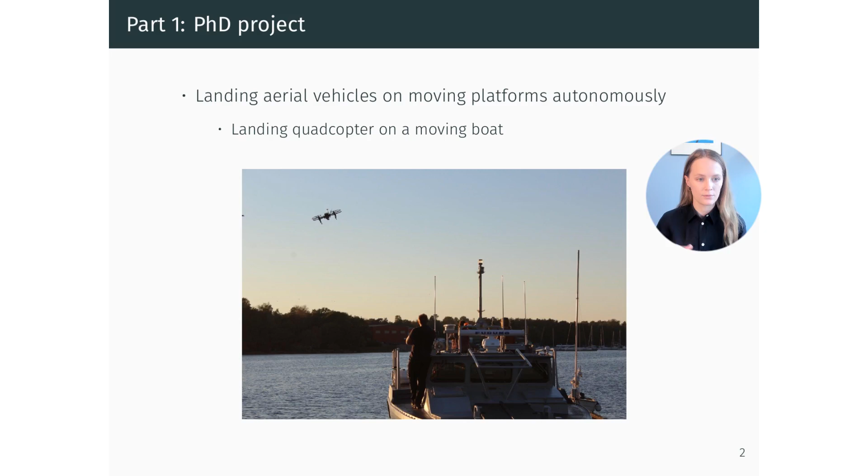So the problem that we wanted to solve was landing some sort of aerial vehicle, in this case a quadcopter, on top of a platform on a boat, which is potentially moving at very high speeds.

We realized early on that this is a very challenging maneuver for many reasons. First of all, it's a safety critical maneuver, meaning that the boat has a lot of important equipment on it that you don't want to hit with your drone. You might have crew working on the boat that you definitely don't want to hit. So there are a lot of spatial constraints on the problem where you cannot fly your drone relative to your boat.

There are many disturbances, for example, wind and waves affecting your boat. There are a lot of other types of state constraints like the attitude that you're flying at or velocity and so on. And furthermore, it's a distributed control problem since we are controlling two different vehicles, and this is also something you have to consider in your problem.

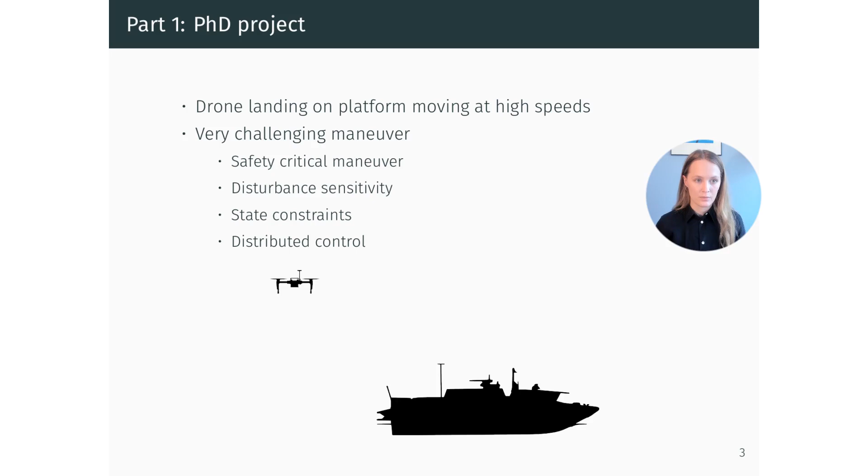So I'm not going to go into any technical details in this presentation. If you're interested, you will find my thesis online. But in the end, what we chose to do is to work with model predictive control, which is an optimization-based control framework. And we chose this for many different reasons.

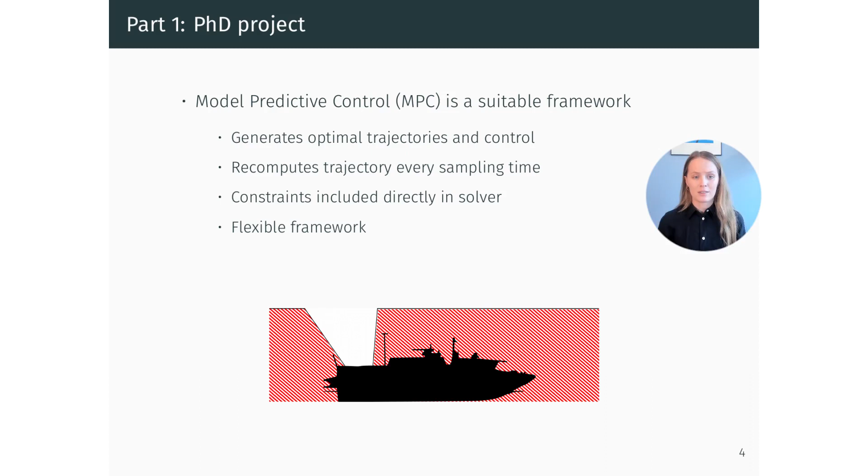It computes dynamically feasible trajectories. You're always recomputing your trajectory, which means that you will at any given point have a trajectory that works right now. The constraints are included directly in the solver, so you don't have to add them afterwards. And in general, I would say that MPC is a very, very flexible framework where as long as you can formulate your problem as an optimization problem and solve it quick enough, then you can use it as MPC.

So the problem in the end is how do you formulate this optimization problem? And it becomes a trade-off between how well do you want to describe reality with your problem, and how fast do you need to be able to solve the optimization problem to run it in real time.

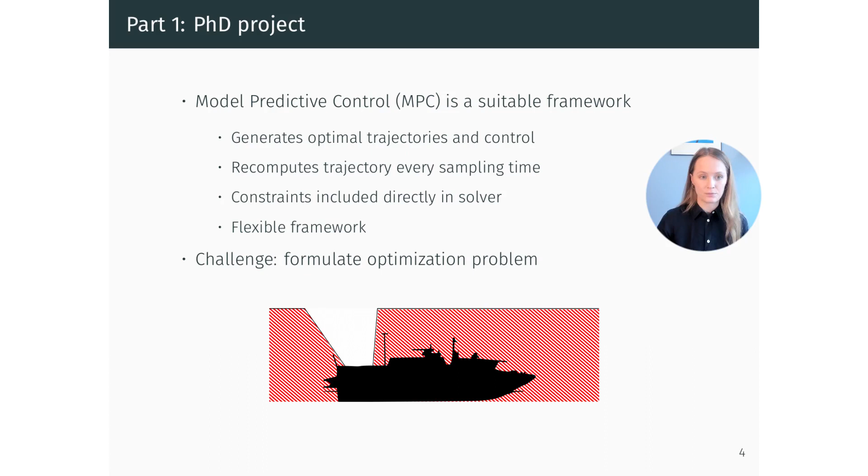From the beginning, it was very important for us to develop algorithms that worked in reality and algorithms that could run on real systems. For this reason, we worked a lot with simulations and experiments.

We were involved from early on with WARA Public Safety, where we had access to the CB90 boat and a DJI matrice. Through WARA, we also had access to a testing area, but most of all, perhaps, we had access to other researchers that we could discuss our problem with, and also people from industry to talk to.

Doing these kinds of experiments as a part of a PhD is definitely something which took a lot of time and a lot of effort. But I would say that in the end, it's really worth it because you learn a lot. You learn a lot of both practical skills while working on these different systems, but you also get a very deep understanding of your problem when you're trying to make it work in reality.

Now I'm going to talk a bit about the work that I've done since graduating. So I joined the Uppsala-based startup AirForestry, and the idea behind the company is to completely reinvent forestry by doing thinning from the air.

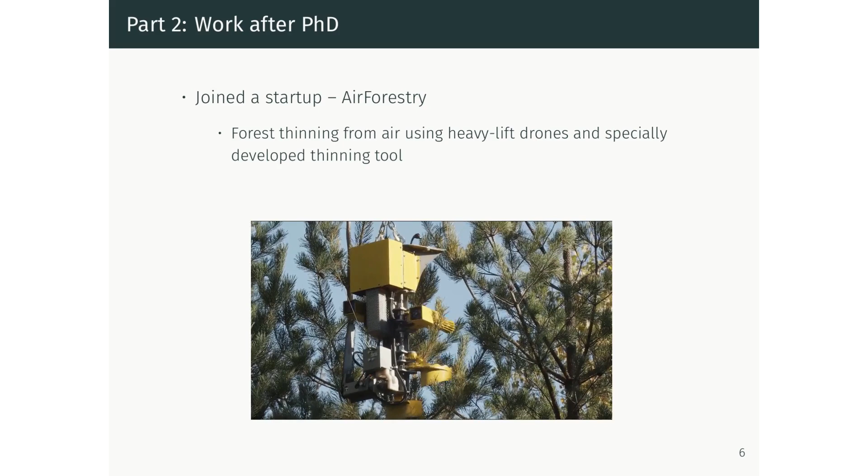AirForestry wants to reinvent this step of the thinning process and remove the need for heavy, fuel-driven vehicles, therefore reducing unnecessary harm done to the forests.

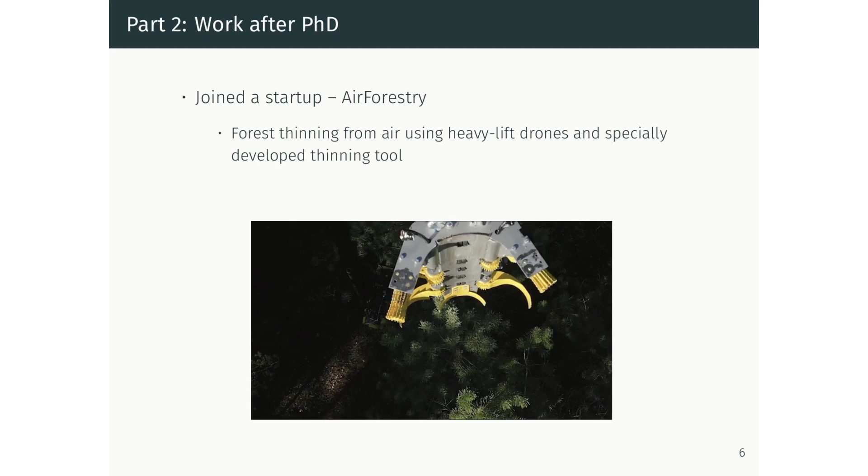This video here shows the specially developed tool from AirForestry removing the branches and cutting down a tree.

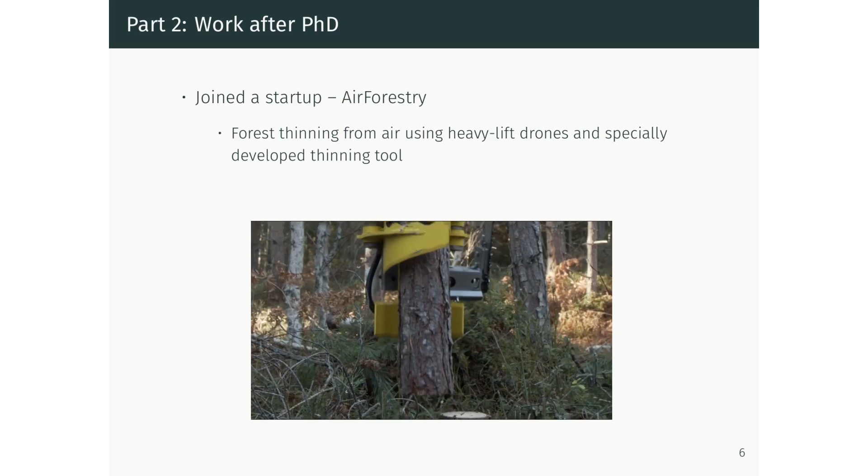After the tree has been cut down, we want to lift the tree out of the forest for collection by the forest owner. For this task, we are developing a 6.2 meter in diameter heavy lift drone that can lift the tool and the tree.

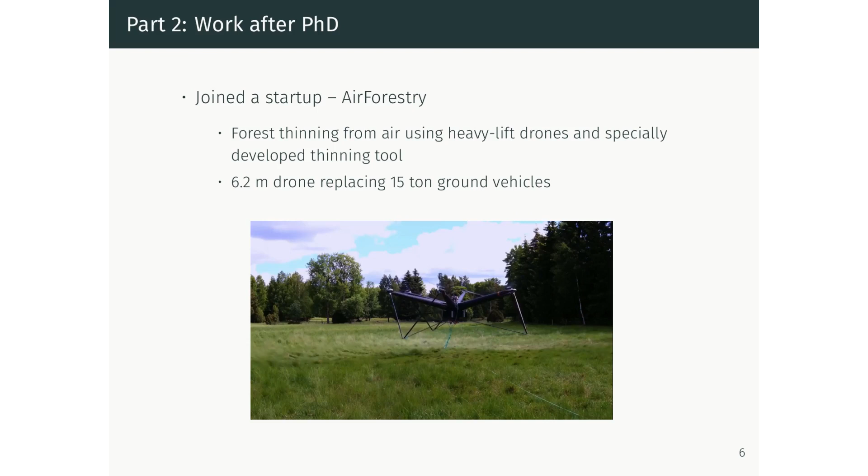As you can probably imagine, there are many cool things that you can do as an engineer with interest in robotics and automation at a company like Air Forestry. I'm going to list a few lines of work that I think are interesting.

To take out a tree, you need to fly the drone close to the forest, place it above the tree of interest, and keep it centered during the entire maneuver. This requires a lot of precision and skill from the pilot. Automating the drone control to remove the need for a pilot has the potential of greatly increasing both the efficiency and the safety of this maneuver.

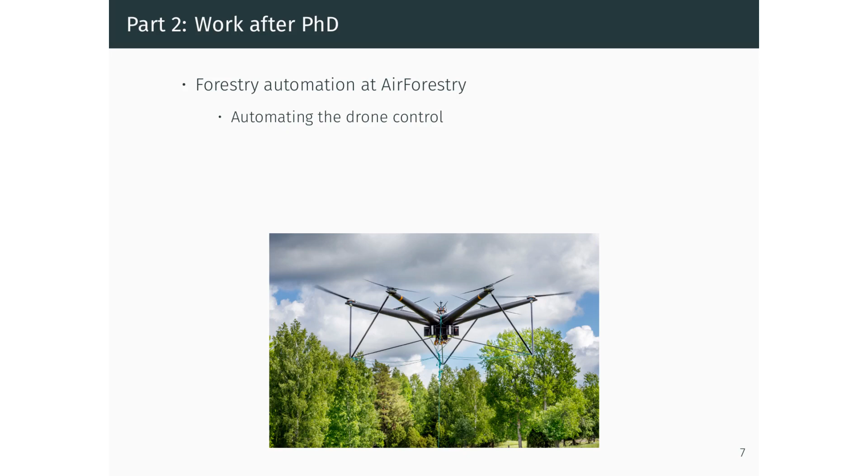To assist with the drone flight automation, you will need good situational awareness, which could include sensing, mapping, and localization from the air. You might also do some kind of analysis with tree population, identifying sickness in trees, or finding clusters where thinning is needed, for example.

Perhaps the most interesting line of work that I see is the use of multiple drones and how they can collaborate in a safe way to thin out the forest.

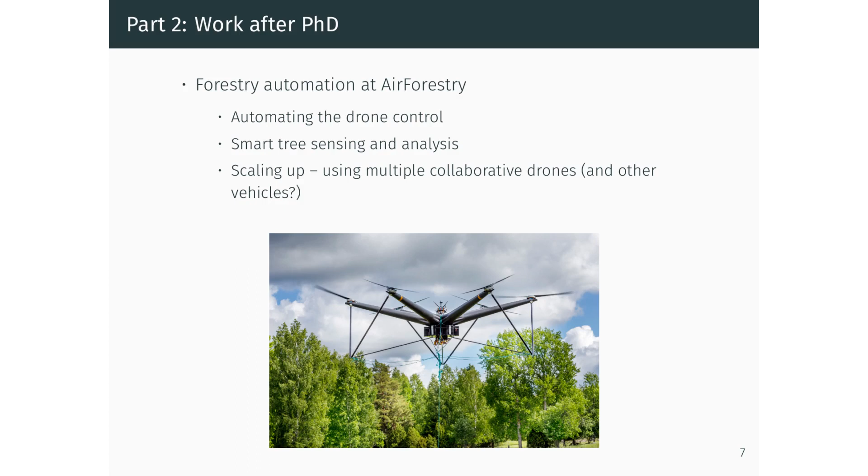For improving the forestry even further, you could imagine extending the system with other types of vehicles, both in the air and on the ground. But for this large-scale system to work safely, we would need to plan multi-vehicle trajectories that are safe, as well as some kind of task planning that assigns tasks to the vehicles, makes sure that they are able to complete them, and which can be updated in real time, since it's likely that unexpected things will happen during such operations.

So for me, going to a tech startup after graduation was a really good choice. I think that one of the big similarities with working in a tech startup and working in academia is that you are inventing something completely new. There is no ready solution to your problem, and you have to really think outside of the box. In that sense, the work is very innovative and creative, which is something that I think suits people who like doing research.

One of the big differences is the pace of the work. Being in a startup in general is more intense. You have to deliver results more often. But to help with this, at least in my case, you have a lot of motivated colleagues that are really great to work with and are really all working towards a common goal, which I think is a great way to work.

So now I just want to say a few concluding words to all of the people who are still in your PhD. First of all, I would recommend doing some kind of practical work as a part of your PhD. In particular, if you're not continuing in academia, it's really good to have the practical skill set as well as your scientific skill set. But also just because I think you will learn a lot about your problem when you try to implement it on a real system.